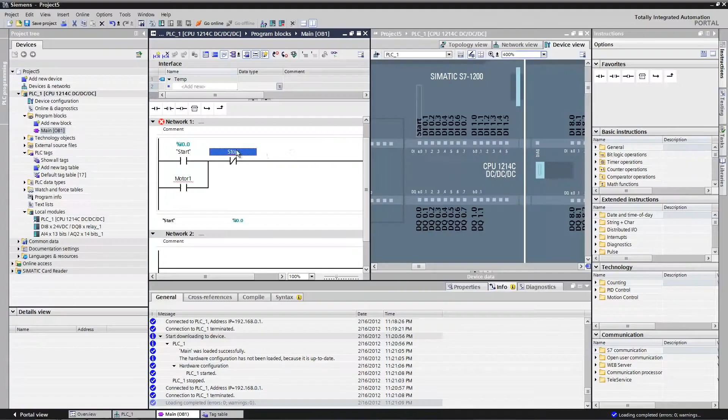Simple movements. They can add complexity to any automation system, especially if you have a lot of them. Let me just show you how easy they can be. First step is we're going to create a new project. Accept a default name, it's not a problem. We're creating a project container now for all the hardware and software to go into.

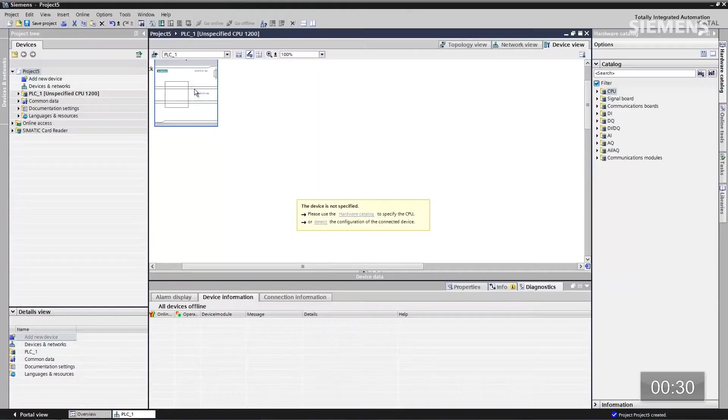Next step is configure a new device, add new device. We're going to choose something called the unspecified S7-1200 CPU, click add. So now we're taking the project container and the hardware container and adding those two together for the project so we can start. Okay, so we have the actual hardware here in the white box.

I have a little pop-up box. I can click detect. I'm going to go out and scan the network now, try to physically find that hardware, and we have. So I'm going to click on it at this point, and in fact I can click the flash LEDs to prove out that this is the correct hardware. This is the correct piece of hardware I want to detect.

Click detect again. This time we're going to go out and scan Profinet, go find the exact CPU and all the associated I/O cards as well as communication cards and bring it back into the project so we can start programming immediately. The beautiful thing about this is I don't have to use the hardware catalog to pick and choose every single piece part. I can scan it, find it, bring in the project, go.

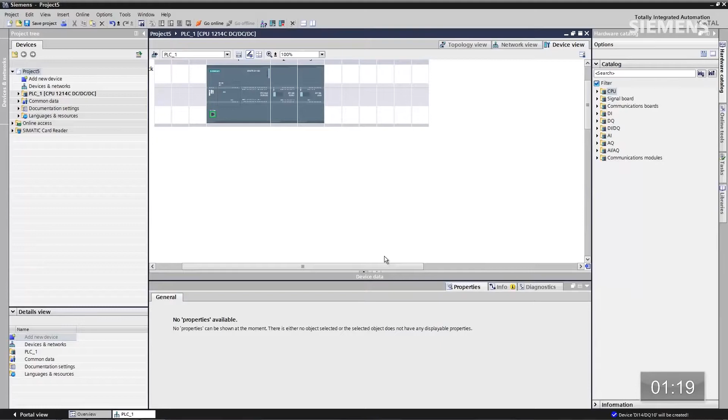Next step. What if we want to change an attribute of this hardware? Okay, let's do that. Let me right click on this analog card, click properties. Now you can see I have a plus or minus 10 volt for this analog card. I'm going to choose plus or minus 5 volt. I'm going to give focus to the CPU and I'm going to click download.

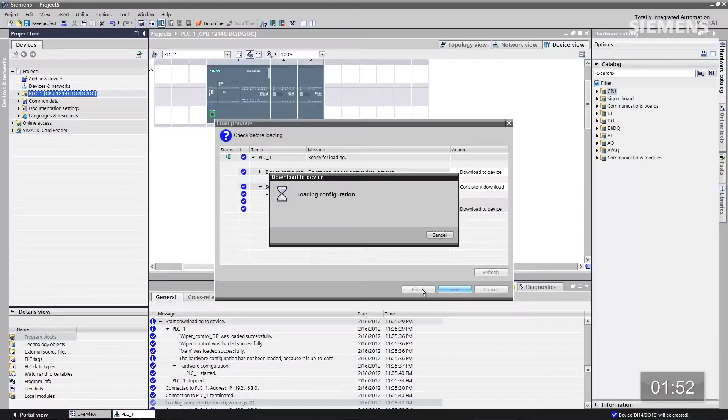So now I'm taking the physical hardware configuration, including attribute changes, and downloading to the actual hardware set so that it's an operational piece of hardware. It's compiling in the project. I click load. Now it's actually loading this to the actual CPU itself. And once it's finished loading, I can click the finish button, click start all, click finish, and now we should have a set of all green LEDs for this piece of hardware.

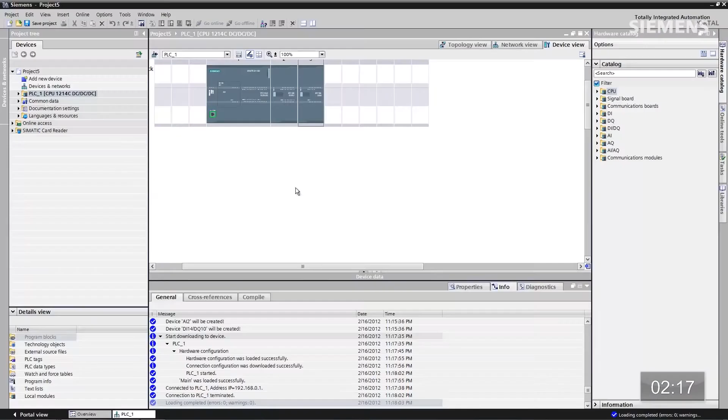Now, you remember I changed one of the attributes for the analog card. So that means I could turn this analog potentiometer and you see we actually have red LEDs across this. I went beyond the 5 volts. One thing you can do immediately is go online with the CPU, give focus to it, click the online button. Now that we have orange bars across all the physical hardware, you can tell that we have been online with this hardware set, and you can see all the red wrenches here.

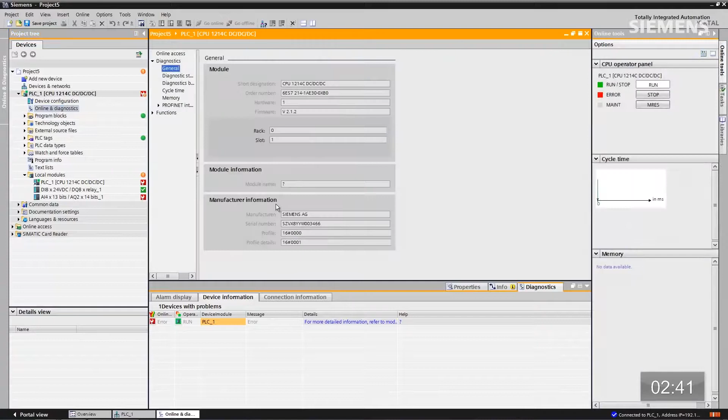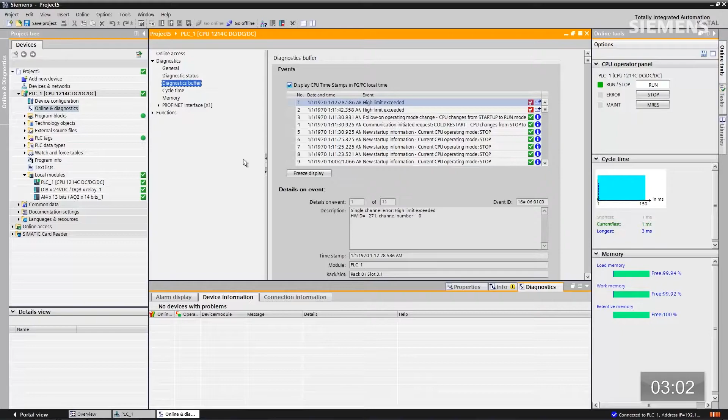I can go down to the module level and I can see that there's something going on with this analog card. At this point I can double click on online and diagnostics and go to the diagnostic buffer, and as you can see we have a high limit exceeded with the wrench for the actual output of this analog card. So if I go back and solve the problem, turn the switch back, now it's an outgoing message and the issue is solved. Basically this means we have the ability to create online diagnostics for your hardware set, and you didn't have to do a single thing to do that.

You didn't have to program for it, you didn't have to choose any menus, it automatically will give it to you right out of the box. So let's go back offline with this CPU, and close the screen, back to the hardware set.

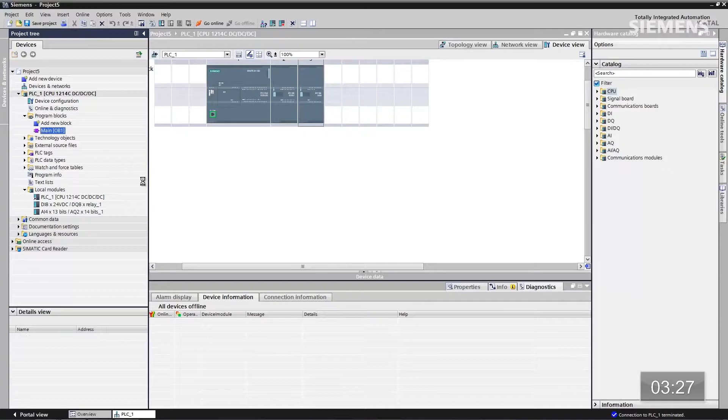How about programming? Let's go ahead and start that right now. First step, the main OB. You can see, if I go here and start flipping dip switches, I have absolutely no program in this particular CPU at this point. It's just a hardware configuration.

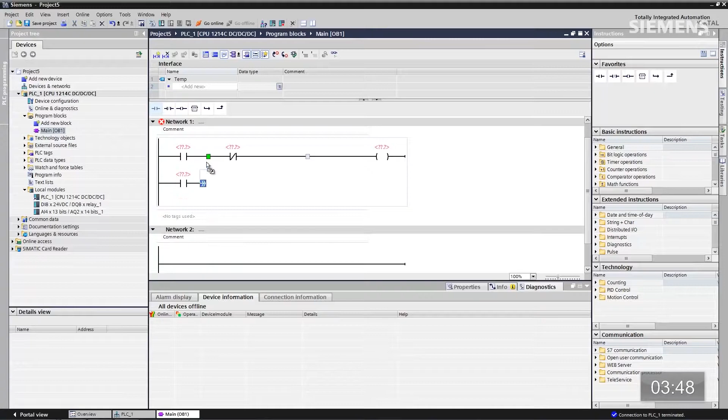Let's go choose a normally open contact, a normally closed contact, a coil, another normally open contact. Let's tie those together. So now I've actually literally built a seal-in circuit used time and time again in automation engineering. How about the tags? Let's go start programming that real quick. Let's say start for the first one, motor 1 for the next one, stop, and then for a coil, motor 1.

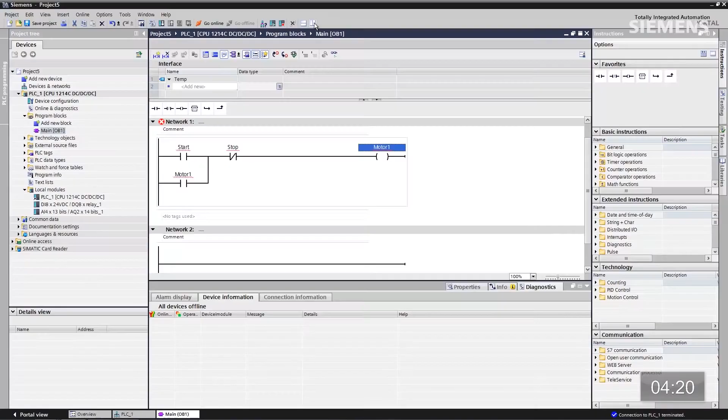So our seal-in circuit's done, our tags are done, however they're not tied to the hardware set yet. So next thing I can do is do a split screen, give focus to the CPU, go to 400%, and as you can physically see here, the hardware set has the associated bits of the actual points. Well, guess what? I can drag and drop that start directly to that point.

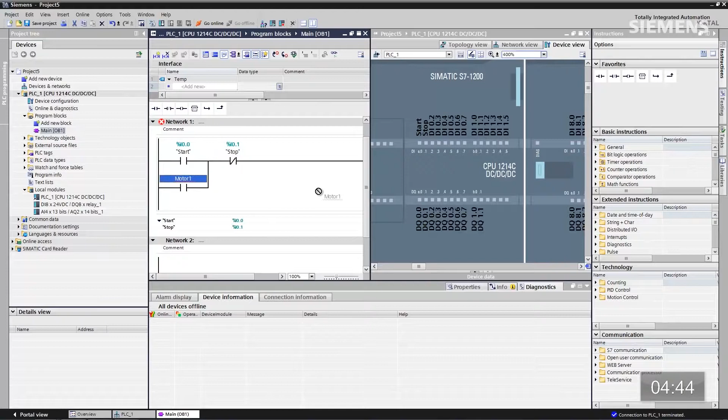There's the start, there's the stop, there's the motor 1. Our code is now complete. I did it in just a matter of seconds. I can drag and drop between multiple editors.

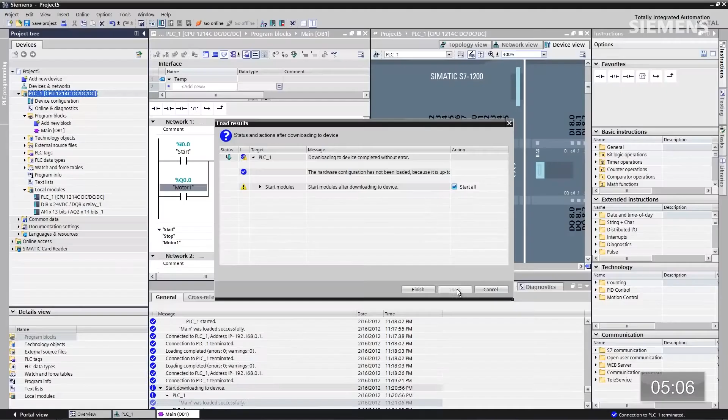That's engineering efficiency. Next thing I could do is actually download this quick program to the CPU, give focus to it, click the download arrow button. Now it's compiling in the background. Click the load button. Now it's actually going to load it to the CPU, and then click finished. And once this LED goes green, you can see that my standard seal-in circuit is complete.

Okay, we've done our standard seal-in circuit. How about user-defined function blocks? We have the ability from a global library standpoint to create anything you want to from a programmatic standpoint, add it to the library, and reuse it over and over and over again. That way you can create engineering efficiencies in your daily work.

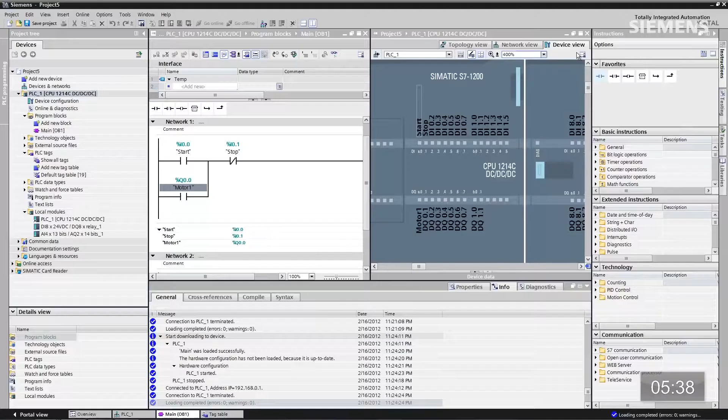Let's do exactly that. Let me close this. Let me click on libraries, drop this down, and you can see I have something called the AT1 simple movements. There's a wiper control block here. Let me drag this into the project. I'm just going to accept the default data block, no problem.

Next thing we can also do is not only can I take a function block, the potential associated tags, you can reuse those over and over again, save those to the global library as well. Let me go grab the wiper control tags, pull it into PLC tags. Now we have the tags and the block. All I can do is associate them together, and we can move forward.

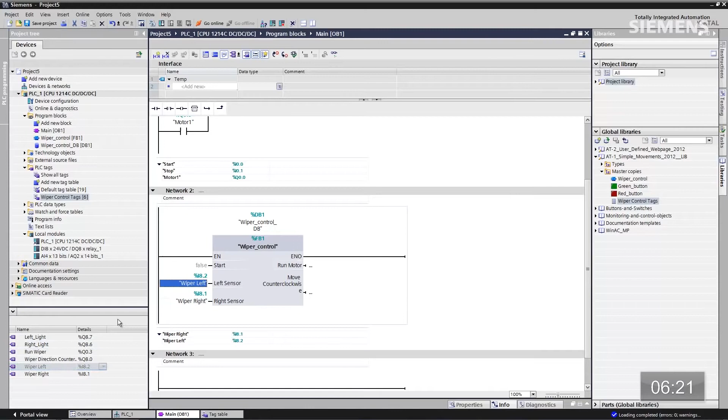There's the right wiper. There's the left wiper. Here's the counterclockwise as well as run wiper. Next thing we can do within the same editor, I can go grab the actual coil from the seal-in contact, hit Control, drag that down to the start, and I can actually use interoperability between lines of code in a single editor. Our code is complete.

If I give focus back to the CPU, click the download arrow button, it's going to compile this in the background. Once it's finished compiling, I can click load. Now it's actually going to load that code to the CPU. Click finished. And at this point, I have a fully functional wiper control system, and I did it in less than 10 minutes. Now that's engineering efficiency.